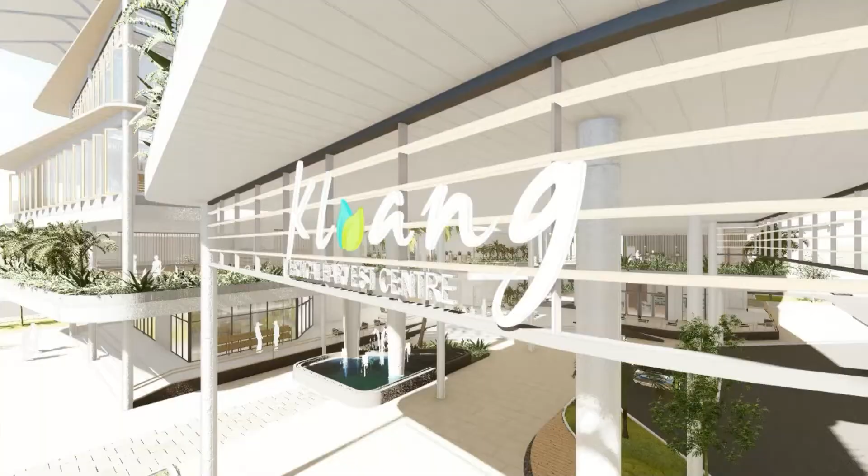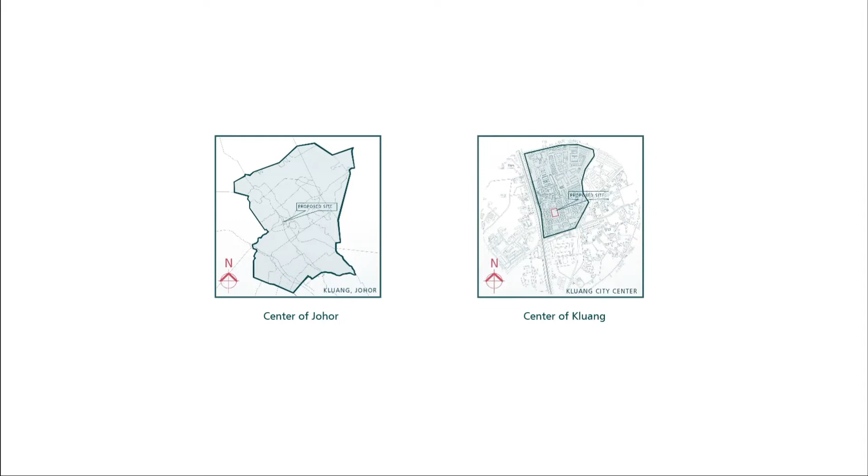The project is located at the center of Johor State, Kluang District. The proposed site is located at the center of Kluang District, so-called the City Center of Kluang. The proposed site is surrounded with roads and buildings classified as heritage buildings by the government, which means the site is located at a strategic location connecting all the adjacent buildings and human activities.

So why is it proposing an urban farming and urban gardening project in this site? Back to the background study of Kluang: Kluang was founded in 1915, where it was exploited by the agriculture sector, and Kluang became an agriculture hub of Johor in the early days. Nowadays, it brings popularity to Kluang as an agritourism and ecotourism destination.

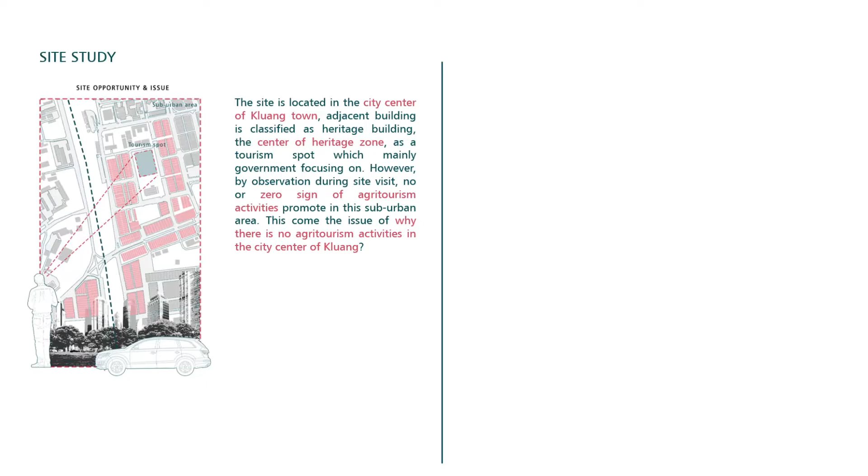Continuing with the site study, the site has the opportunity to become a tourism spot in the future. However, during the site visit and observation, there is zero sign of agritourism activities promoted in this area. This raises the issue of why there are no agritourism activities in the city center of Kluang.

The reality is that Kluang, as a suburban city, keeps developing, which has actually driven agriculture further away from the city edge. The harmonious relationship between agritourism and the urban environment has become severed, making the city center of Kluang overcrowded and losing an aspect of life that was deeply rooted in the local culture.

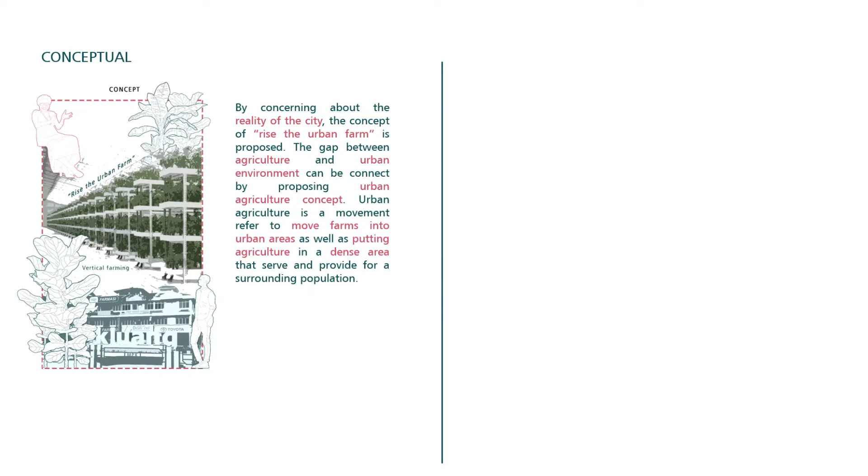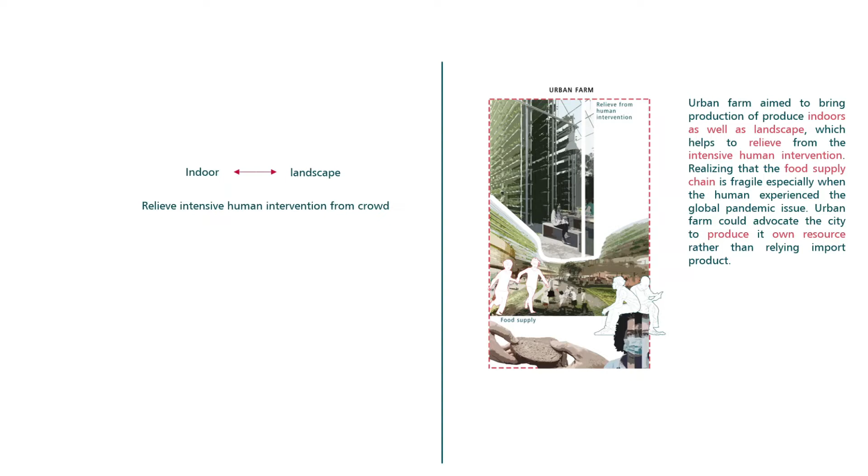Therefore, the concept of Rise the Urban Farm is proposed. Urban farming and urban gardening concepts are aimed to bring indoors as well as landscape, helping people relieve from intensive human intervention, while also responding to the pandemic that everyone has experienced.

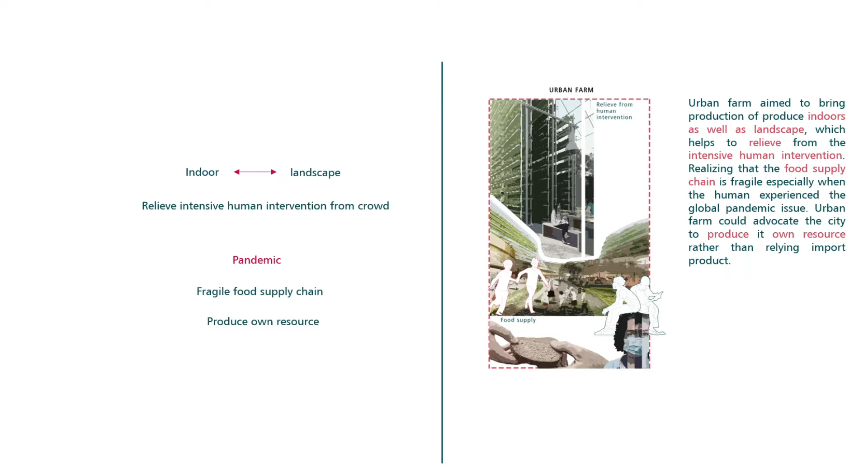We know how fragile our food supply chain is. An urban farm could advocate for the city to produce its own resources rather than relying on imported products. The design aims for a vertical harvest center to ease the hustle and bustle of the city, while also advocating and educating the public on the urban agriculture concept.

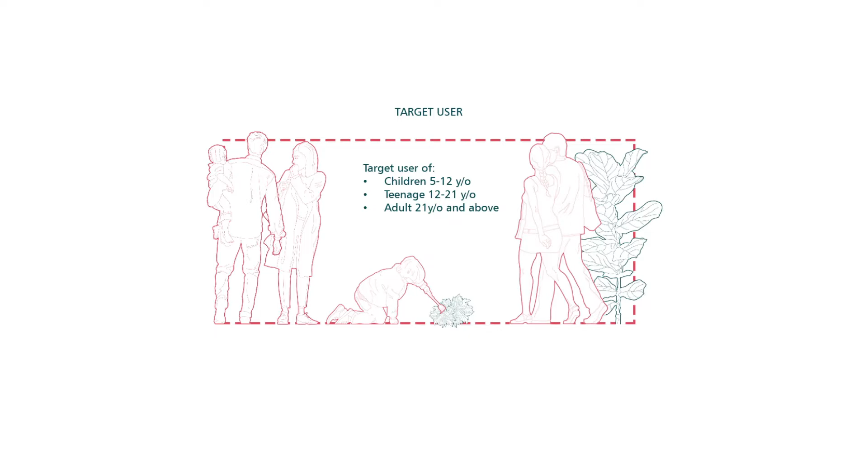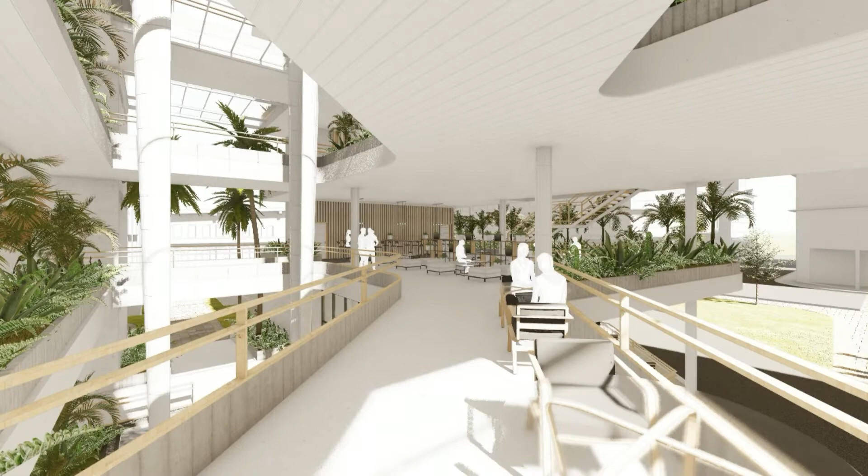For the proposed building program, the main program includes a greenhouse visit, and to cater to the education purpose, workshops for adults and teenagers, while a living classroom is included for teenagers and children. To gather the public and attract tourists, some community spaces are also proposed and designed to become more functional and multi-purpose.

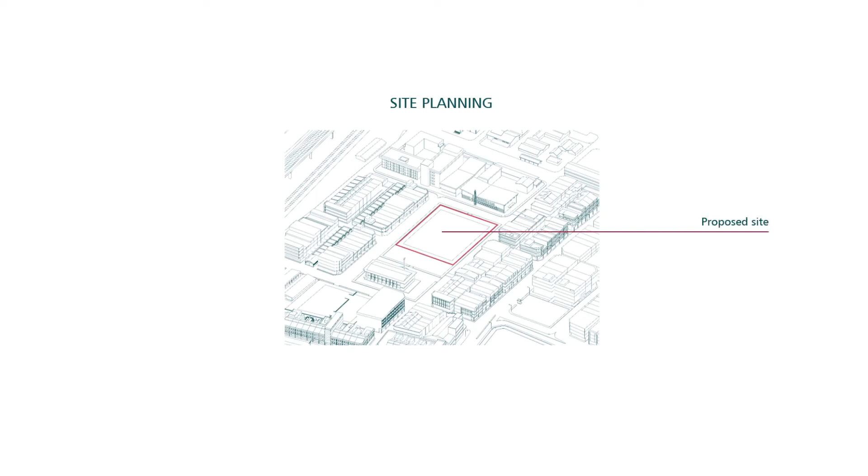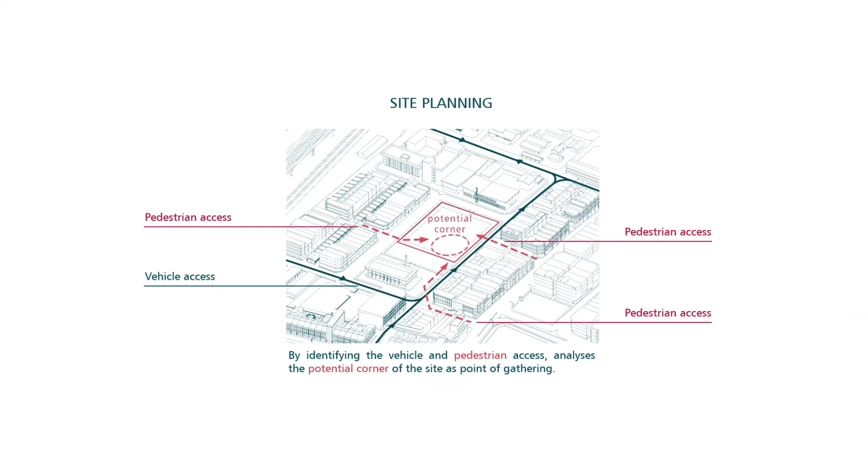About the site planning, first is to identify the pedestrian and vehicle access. The potential corner is spotted and found suitable to become the frontage of the building.

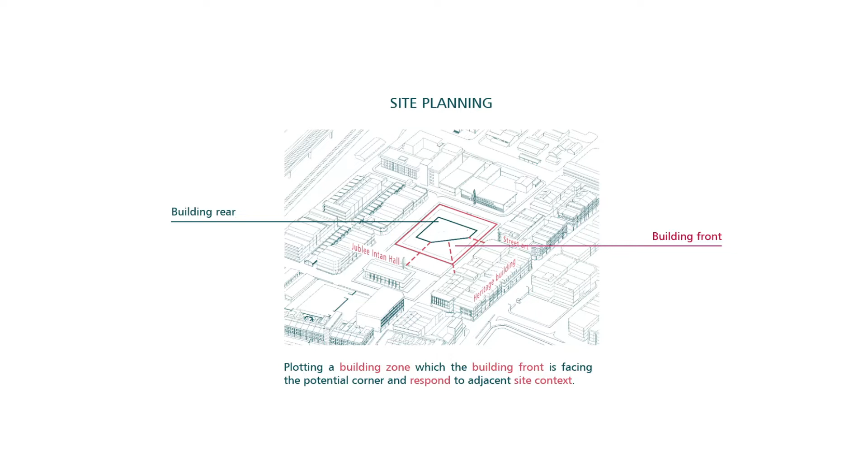In front of the building will be landscape to cope with the existing pocket space, while the building rear faces the parking and servicing bay.

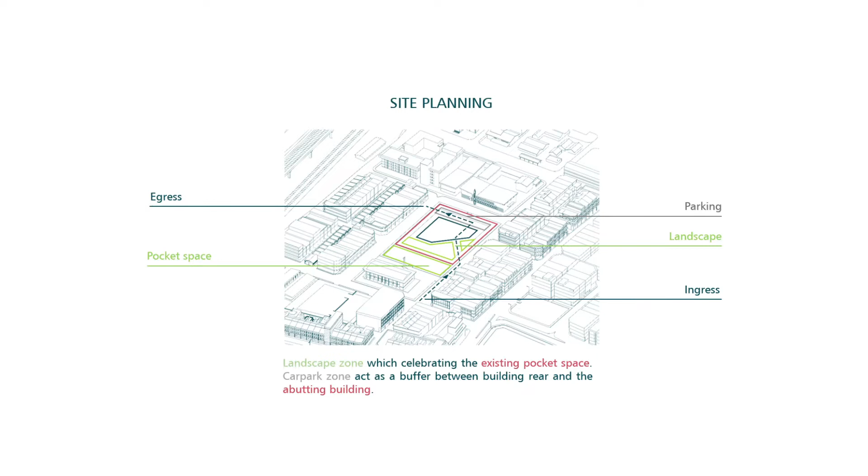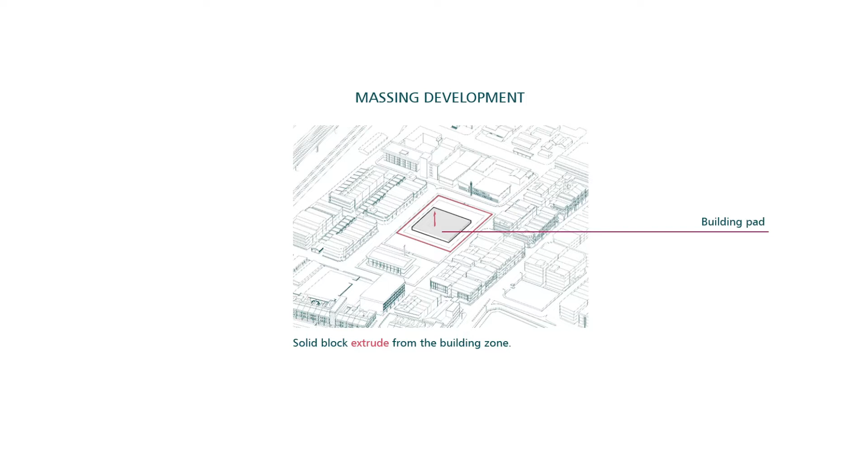During the massing development, first the building pad is extruded, then subtracted with the existing pedestrian walking pattern, and the form is elevated to make the ground floor more pedestrian friendly.

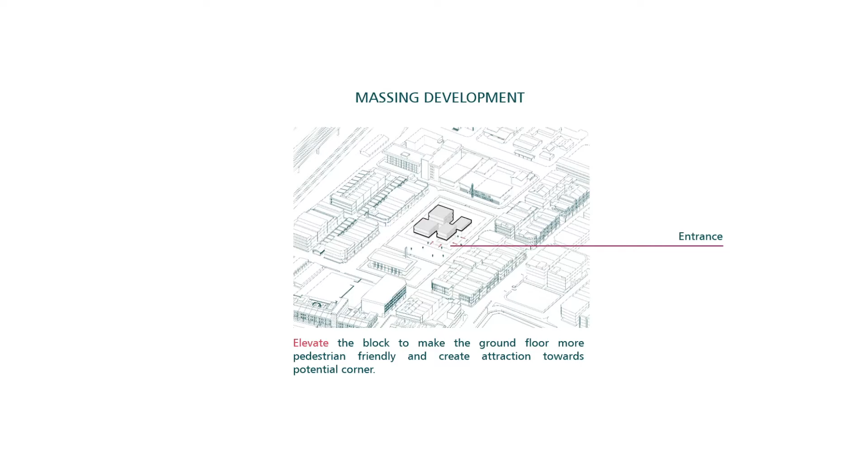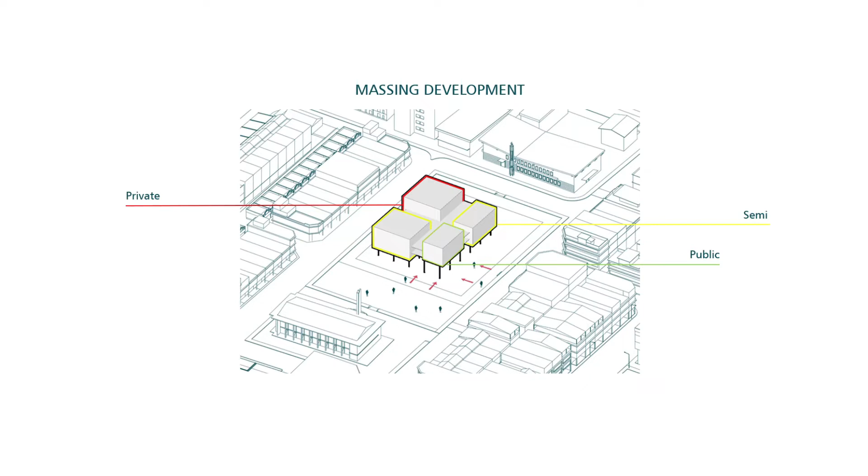To make the design more functional, the block is differentiated into different privacy levels, with public areas located at the building front, while private areas such as services are located at the building rear. The connection between the blocks uses natural cross ventilation and urban gardening. Lastly, the butterfly roof is added to harvest rainwater.

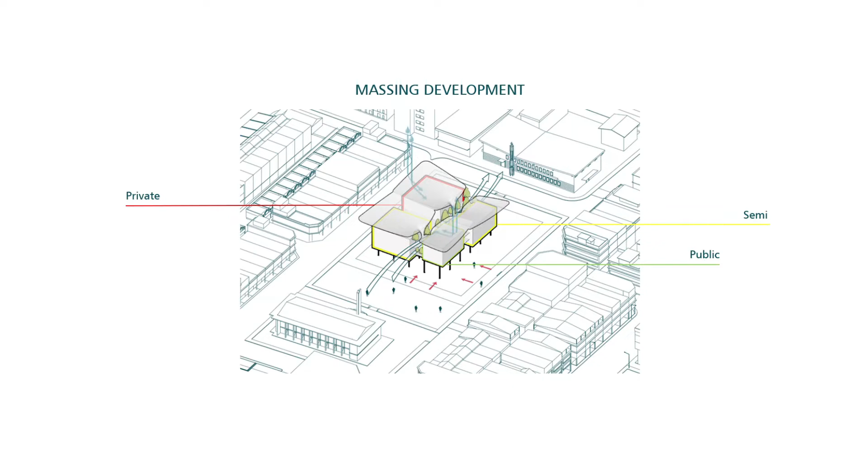From the exploded isometric, it shows that the ground floor is designed for pedestrians to easily approach the building from every 4 directions, and all directions lead to the lobby, which is celebrated with a rainwater harvesting pond.

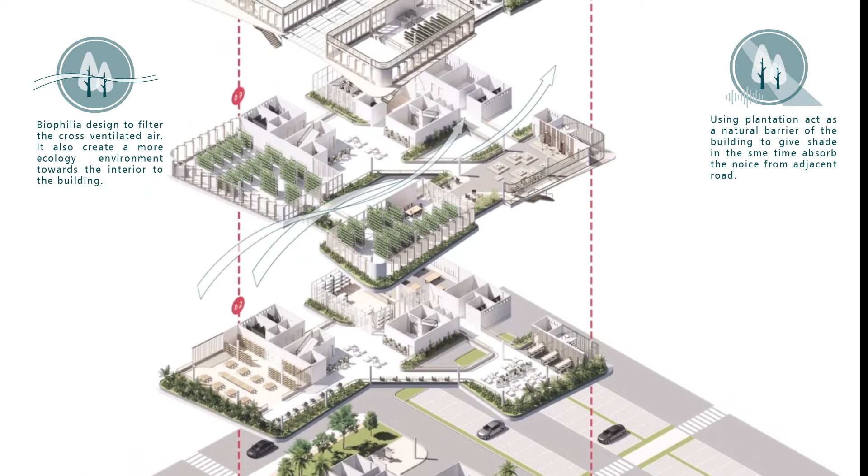For the upper floor plan, it's clearly seen that the design applies a biophilic approach, using plantation to act as a natural barrier, giving shade to the interior and creating a more ecological environment in the building, as well as absorbing noise from the adjacent roads.

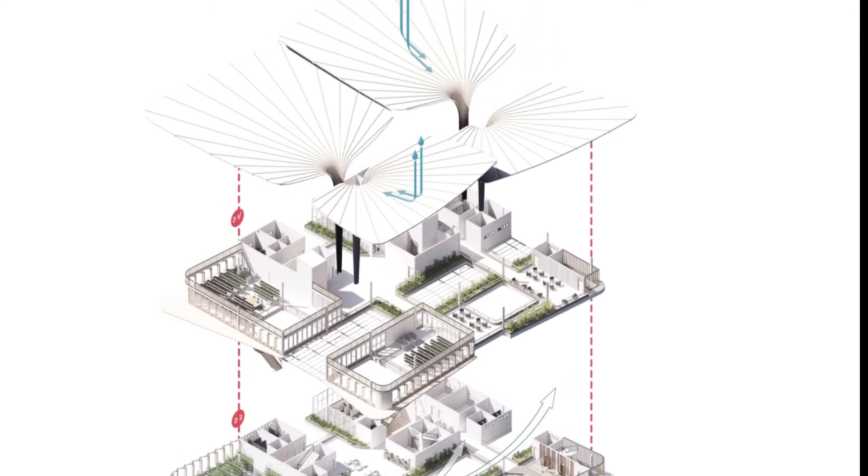At the top, the so-called butterfly roof, which gives identity to the overall design, channels the rainwater to the ground, where it is filtered by the filtration system built underground.

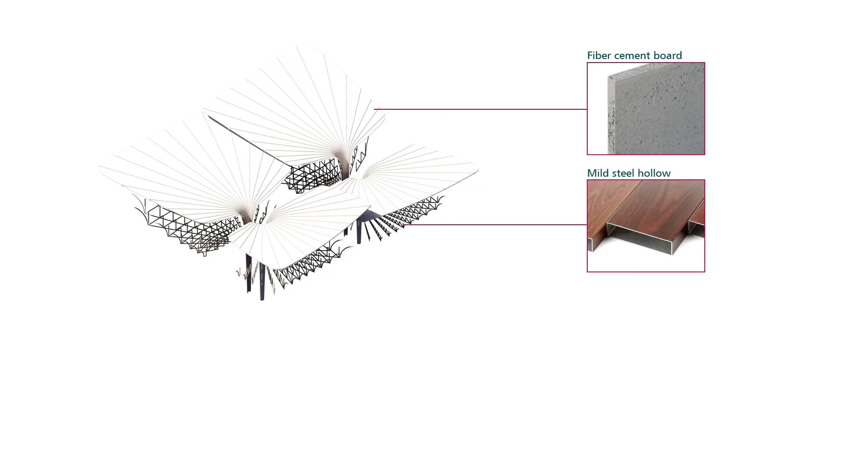The butterfly roof is proposed to use fiber cement render board as the main roofing material, supported by steel trusses with selected timber grain powder coating, connected by aluminium profiles for detail. The rainwater filter and storage are designed to be cast underground with a floor access hatch to allow for maintenance.

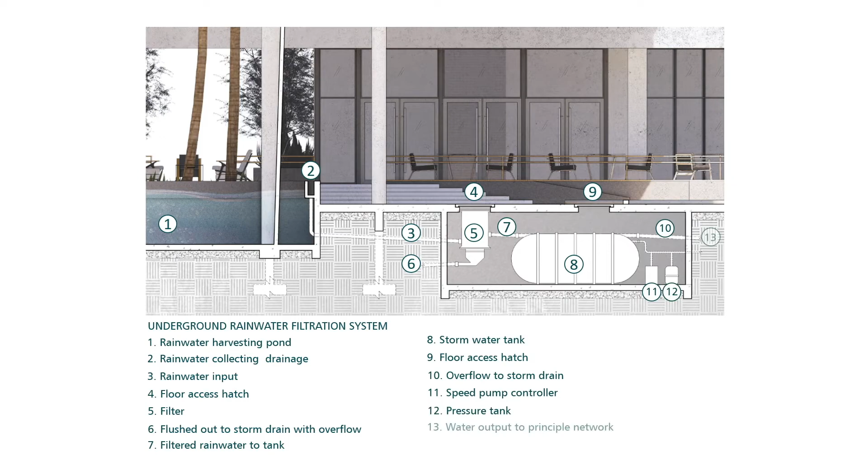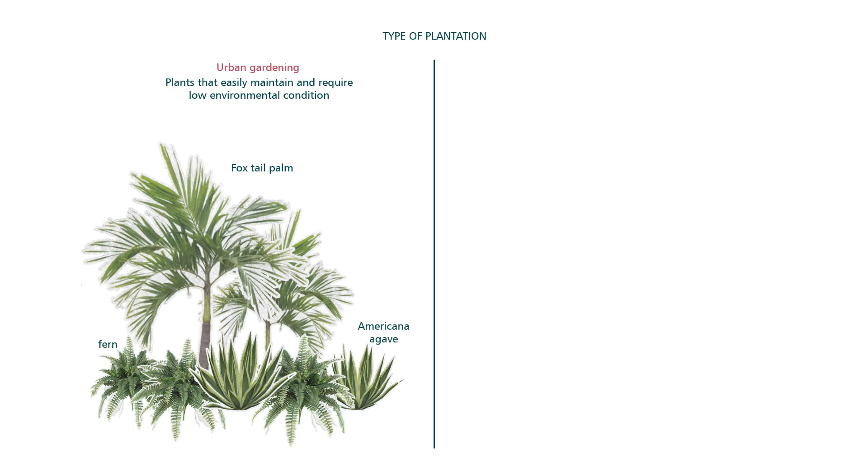For urban gardening, the selected plantation will be plants that are easily maintained, like foxtail palm, which is existing on the site, including fern and Americana agave. For urban farming, it is proposed to have crops suitable to be planted indoors in our tropical climate.

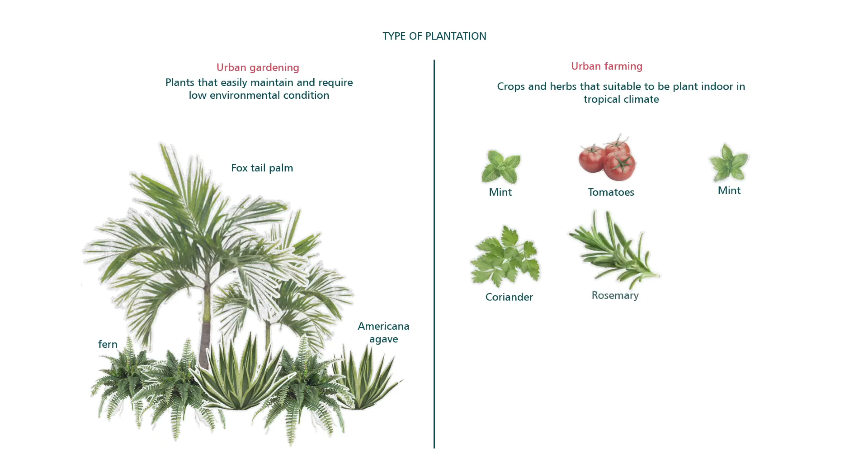Last but not least, one of the most important techniques for urban gardening and urban farming is the irrigation system. The planter boxes built into every floor are designed to have a self-irrigation network and overflow discharge, making daily watering easier for workers and farmers.